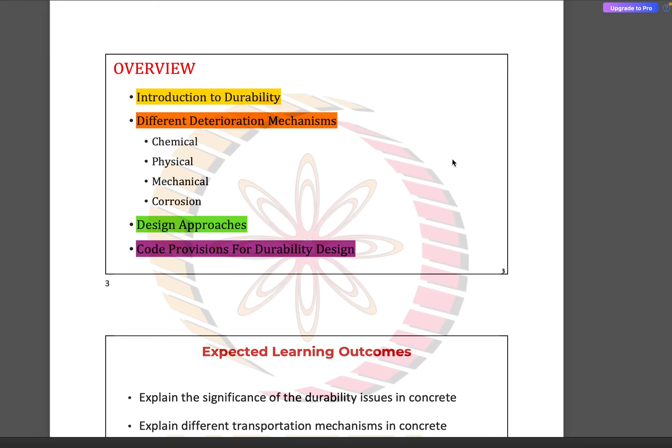This module has been divided into 4 parts. The first part consisted of the introduction to durability aspects in reinforced concrete design, giving an overview of the entire module. We first saw the introduction to durability, then looked into different deterioration mechanisms—chemical, physical, mechanical, and corrosion related aspects. Then we looked into design approaches for how to design structures to reduce and control the deterioration process, and we discussed code provisions associated with durability design.

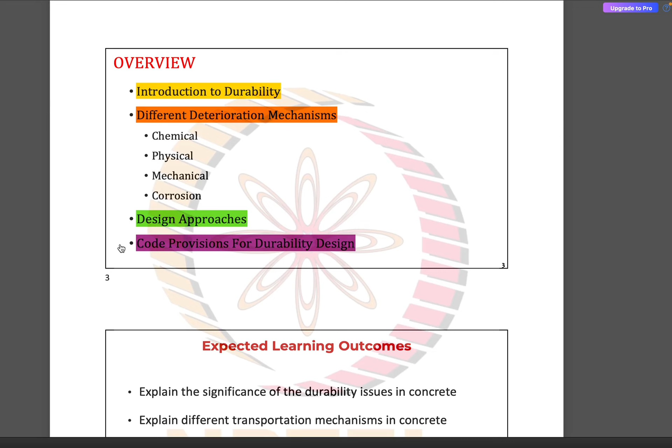For this part, the learning outcomes are that we understand the significance of durability issues in concrete, try to understand the different transportation mechanisms within concrete, and look into different methods of improving the durability of reinforced concrete.

When designing a structure, essentially we look into the strength and serviceability aspects, but the durability aspect is equally important, because if a structure is not durable, it cannot meet its desired service life. It tends to deteriorate well before the service life, requiring repairing functions to restore the structure so it can resume regular functioning in terms of strength and serviceability.

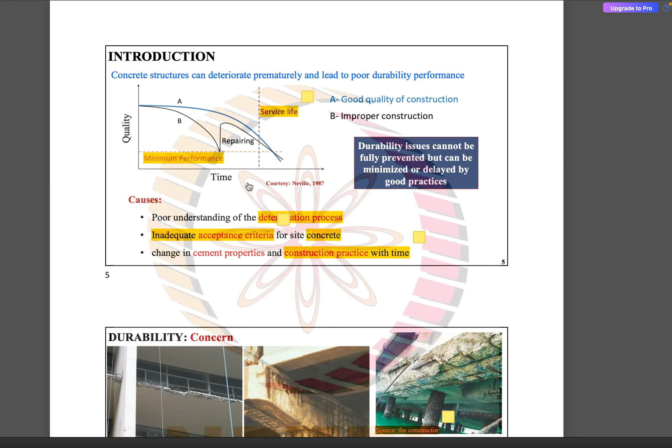So it is important to address the issues of durability during the construction process. This is what happens to structures if the durability aspect is not taken into consideration—here we can see there is spalling of the concrete cover and exposure of the steel reinforcement within RC structures.

So when we try to look into the definition, the durability of structure can be defined as its ability to withstand its design service condition for its design life without significant deterioration or with minimum maintenance.

In order to ensure that a structure is durable, we need to look into two important aspects: the reinforced concrete system and the environmental conditions. For the concrete system, there are intrinsic factors such as cement type, cement content, and properties associated with the concrete. Then we have extrinsic factors, that is how the concrete is prepared, mixed, and placed so as to achieve the functions it was initially designed for.

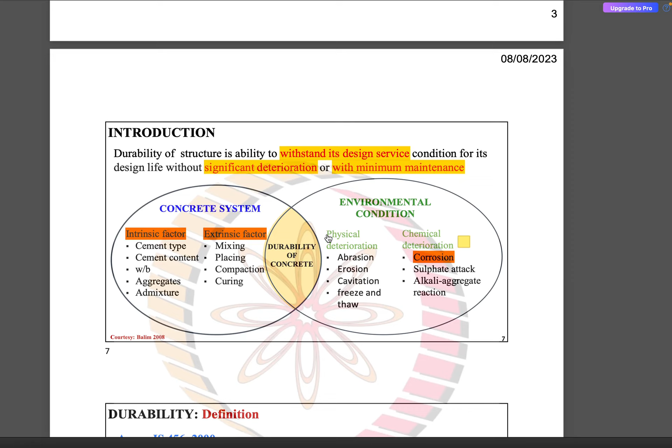Then we have the external environmental conditions. We have to design structures to withstand environmental conditions, be it physical deterioration or chemical deterioration and so on. The IS 456 and ACI codes have different definitions for the concept of durability.

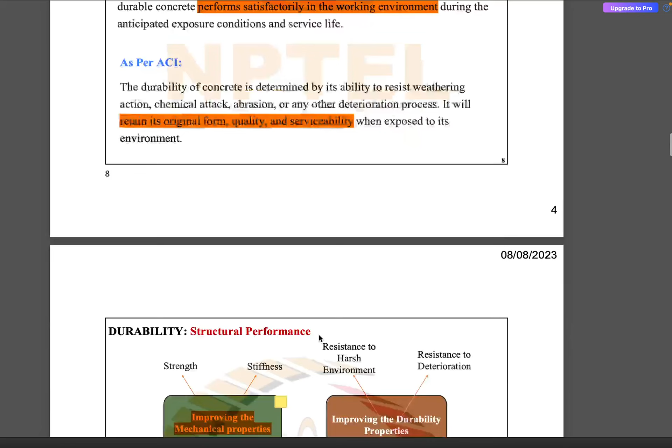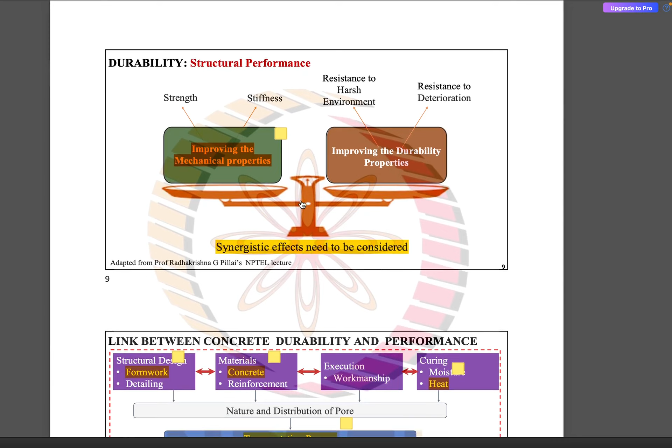Moving forward, when we look into mechanical properties, we are primarily concerned with strength and stiffness. When we look at durability properties, we need to ensure adequate resistance to the harsh environment and the required resistance to external deterioration processes. So to ensure successful functioning of reinforced concrete structures, we need to consider the synergistic effects of mechanical properties and durability properties.

Moving forward, we look into the link between the durability of concrete and its performance. Right from the process of structural design, detailing, material properties and how it is cured, that affects the nature of the concrete and the distribution of pores, and that affects the transportation process.

The transportation process, as we'll see later, is essentially the transportation of fluids and ions within the concrete. As the transportation of chemicals becomes easier, the concrete becomes more vulnerable to the process of deterioration, and therein lie the durability issues.

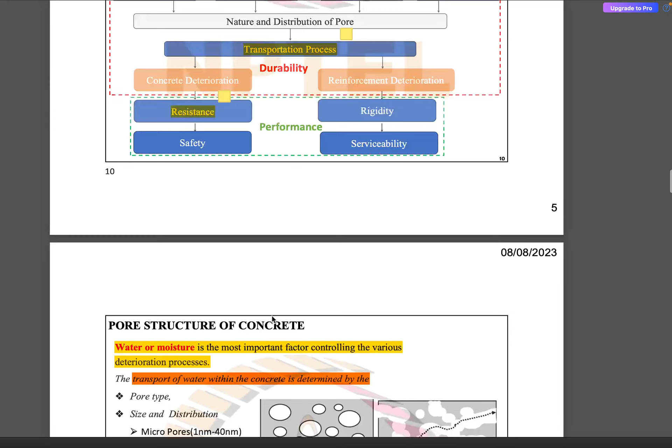If you are able to achieve adequate durability properties, then even the performance of the structures can be safeguarded. So here we look into the different types of pores, and one of the most detrimental aspects is when there is interconnection between them, making the transportation of fluids and ions much easier, leading to an accelerated process of deterioration. These are the different sizes of pores within concrete.

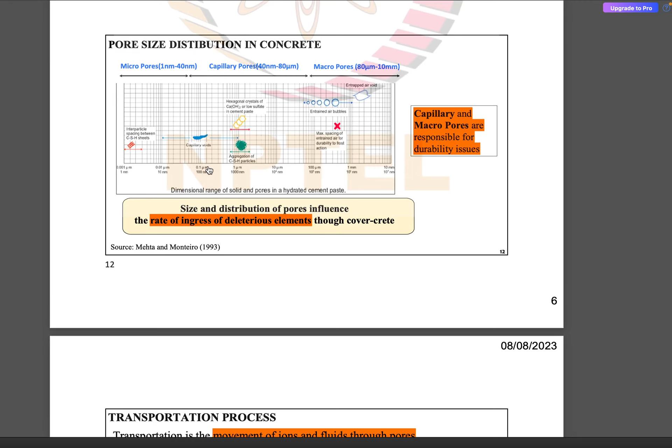Usually there will be transportation of aggressive agents, so we need to ensure adequate concrete cover of suitable thickness, and the pore structure has to be managed so that there is no transportation of deleterious materials.

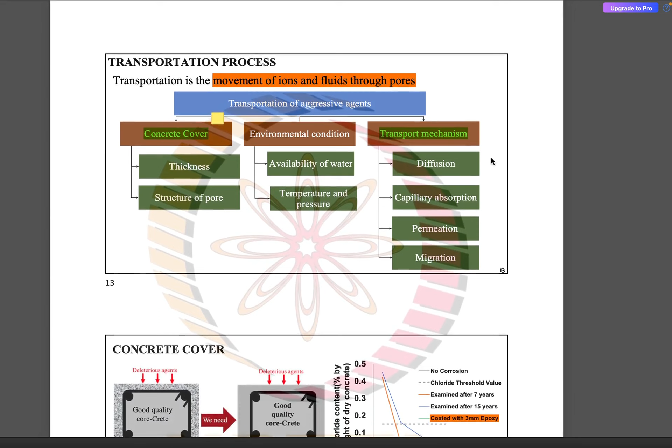Then we need to design the concrete against environmental conditions such as availability of water, temperature and pressure factors, and against different transportation mechanisms such as diffusion, capillary absorption, permeation, and migration. Here we look into the aspect of concrete cover.

Whenever there is an attack of deleterious agents, if we are able to provide good quality cover concrete, that will enhance the durability and quality of concrete significantly over a period of time.

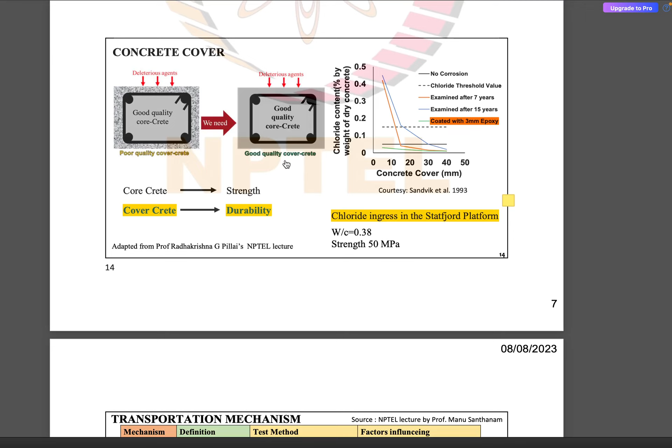So we have different transportation mechanisms and their associated definitions. For example, we have absorption related to capillary action, then permeation, which refers to flow under a pressure gradient, then diffusion, flow under a concentration gradient, and migration, which is essentially the movement of fluids and ions under an applied electric field.

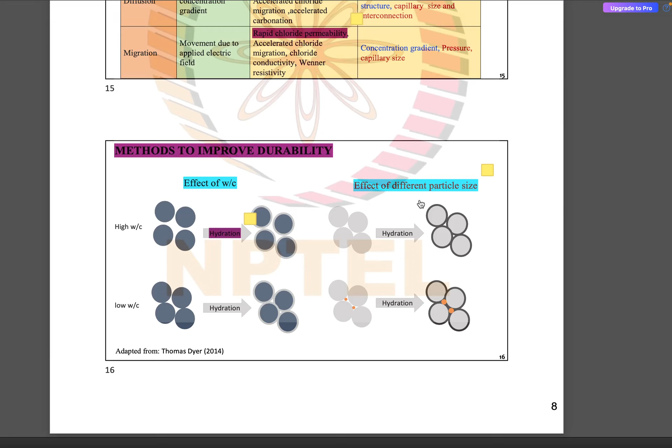Some of the ways of improving durability are reducing the water to cement ratio, and using small particle size components such as supplementary cementitious materials, which can fill the gaps within the concrete and improve its durability. Then we have certain mineral and chemical admixtures.

We'll be looking into certain problems and multiple choice questions in order to understand the role of these admixtures in ensuring good durability properties of reinforced concrete. Then we have the chemical reaction when we use supplementary cementitious materials.

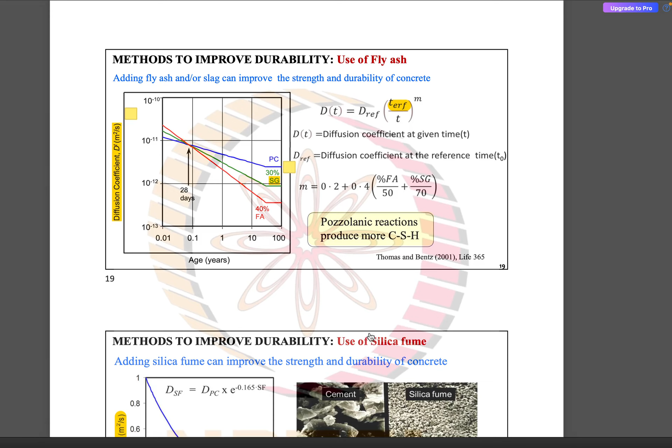Moving forward, we study the diffusion coefficient and how it varies when we use supplementary cementitious materials such as fly ash and silica fumes, and we are going to solve certain numerical problems based on these concepts.

Moving forward, we use certain chemical admixtures. So in summary, we looked into the introduction to the durability issues.

Okay, so I hope that all of you are with me. We can go ahead with the subsequent slides. Yes, sir. Yes.

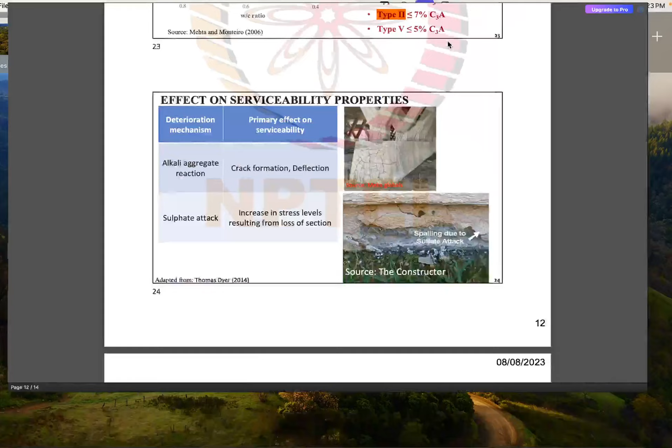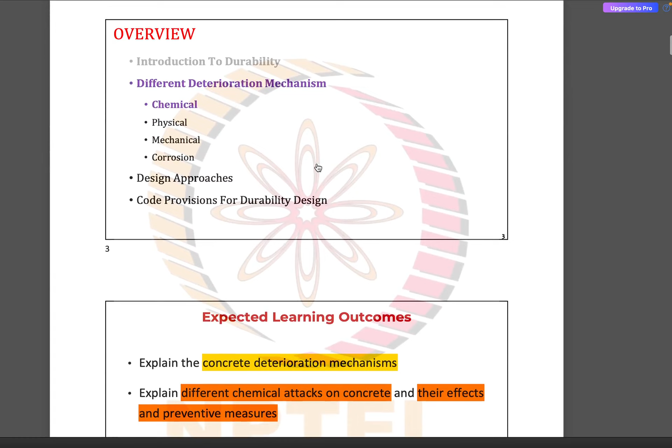So in the second part of the module, we looked into the process of chemical deterioration. There are different types of deterioration such as chemical, physical, mechanical and corrosion aspects. When it comes to mechanical aspects, we have abrasion and erosion. When it comes to physical, we have the freeze and thaw effects. When it comes to chemical, we have the alkali aggregate reaction or alkali silica reaction and the sulfate attack. Then we have the process of corrosion within reinforced concrete.

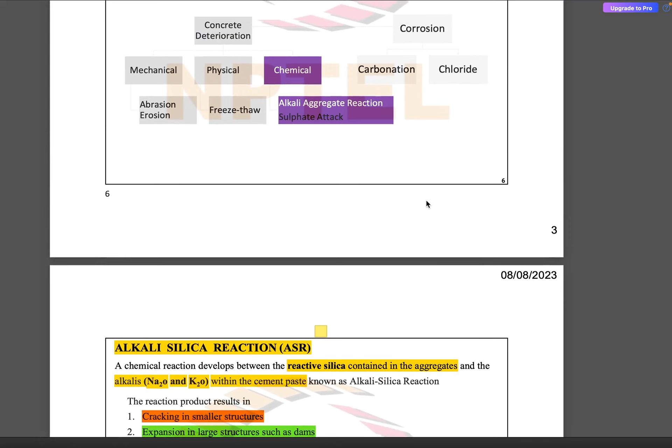So coming to the chemical mechanisms of deterioration, we have the alkali silica reaction. Essentially, alkali silica reaction refers to the chemical reaction between the reactive silica that is contained in the aggregates and the alkalis which are present in the cement paste.

This leads to the formation of a gel around the aggregate particle. Whenever there is availability of moisture, it tends to absorb the moisture from the concrete and from the surrounding environment. That leads to the expansion of the gel, which leads to subsequent cracking within the concrete.

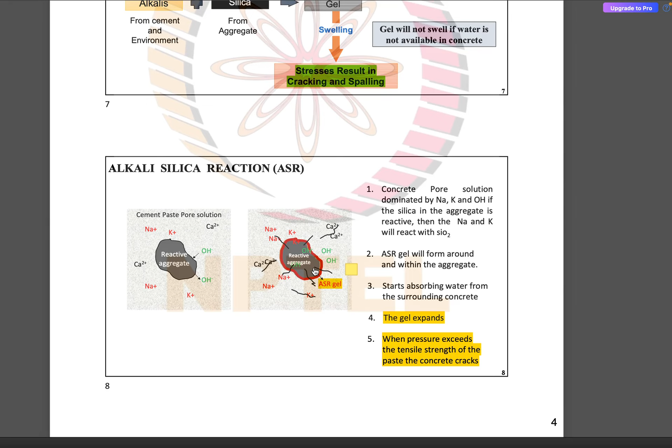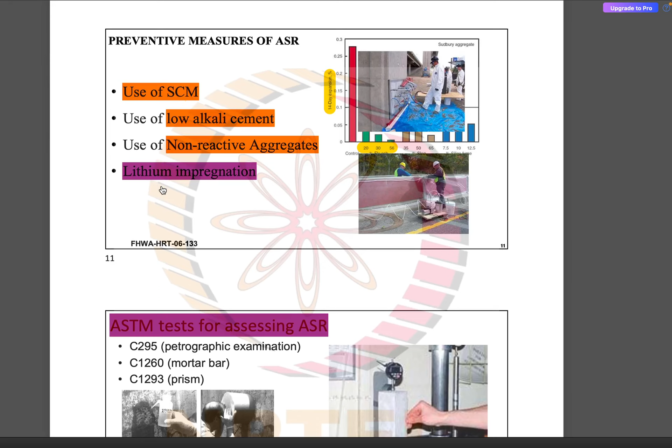Some of the ways of preventing or mitigating the effect of ASR are the use of supplementary cementitious materials, low alkali cement, non-reactive aggregates and lithium impregnation. These are some of the tests which can help us to assess the process of ASR within the concrete.

Then we have the sulfate attack. When it comes to sulfate attack, it can be essentially external and internal. The external attack can be from the soil, which consists of certain compounds of sulfate such as calcium, magnesium and so on, and similarly water also. So this is the effect of sulfate upon concrete.

It can lead to significant deterioration in terms of quality. As we can see, as we already saw in the alkali silica reaction, by altering the water cement ratio, by reducing the water cement ratio, we can mitigate the influence of sulfate attack to a considerable measure.

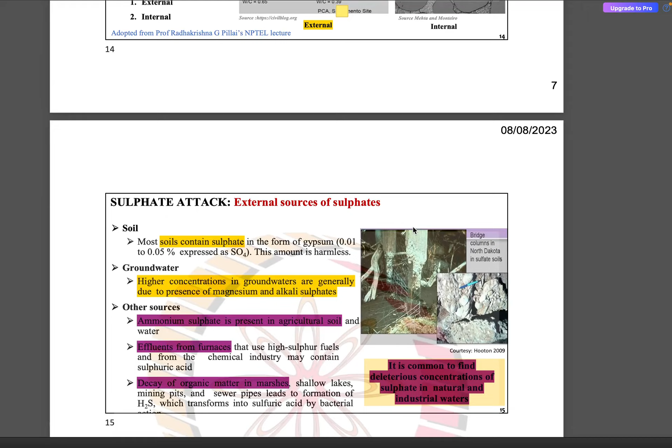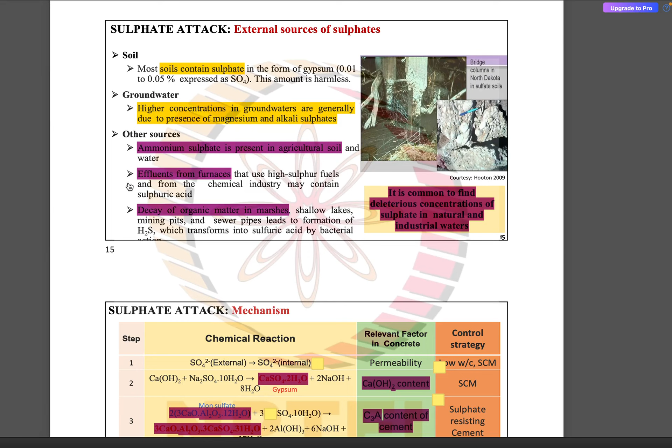When it comes to internal attack, we will be looking at the delayed ettringite formation, which we also looked into in week 2 of the lecture. These are some of the sources of external sulfates, such as the soil, groundwater, and agricultural soil, and the effluents from furnaces, and so on.

As we saw, the reaction between the monosulfate and gypsum leads to the formation of ettringite. Whenever there is a presence of high C3A in the cement, that leads to high heat of hydration, and that leads to the formation of monosulfate, and later on, when it is conducive for the monosulfate, it transforms into ettringite, which is a needle-like structure.

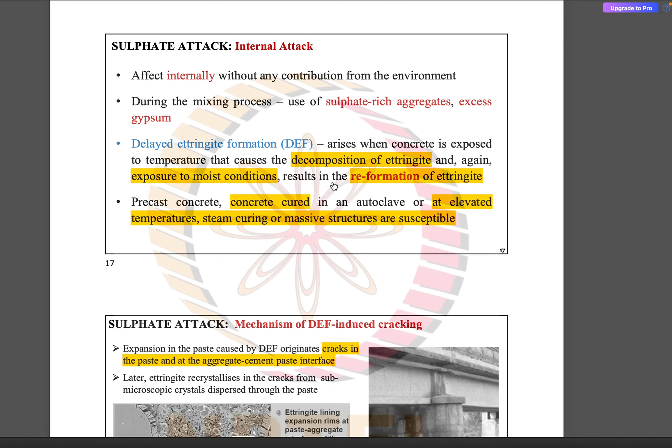Because of the structure of the ettringite, it leads to expansion within concrete, and that leads to cracking and other durability related issues. As I was discussing in the previous slide, this is the process of delayed ettringite formation, that leads to various durability related issues, and these are some of the effects due to the delayed ettringite formation.

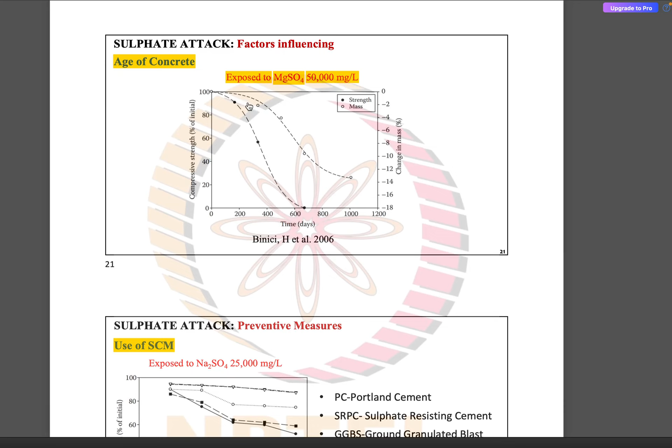Because of the sulfate attack, there can be significant reduction of the strength and mass of concrete. This affects the stiffness and the strength of the reinforced concrete structures.

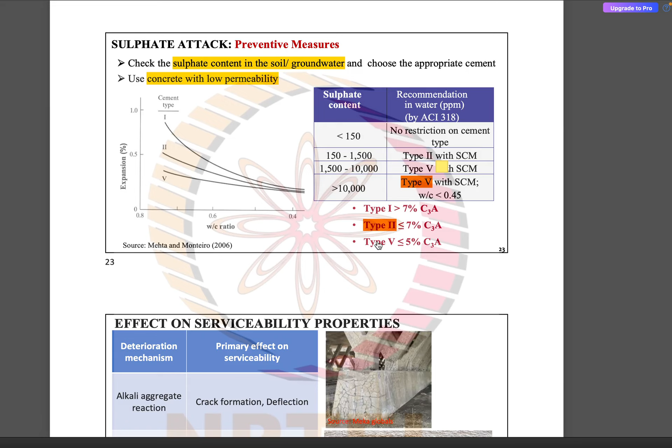Here there are some research articles, some results from the research, and in order to prevent the phenomenon of sulfate attack, we have certain types of cement that are being prescribed by the American Concrete Institute code, and by using essentially type 2 and type 5 cement, we can significantly mitigate the effect of sulfate attacks.

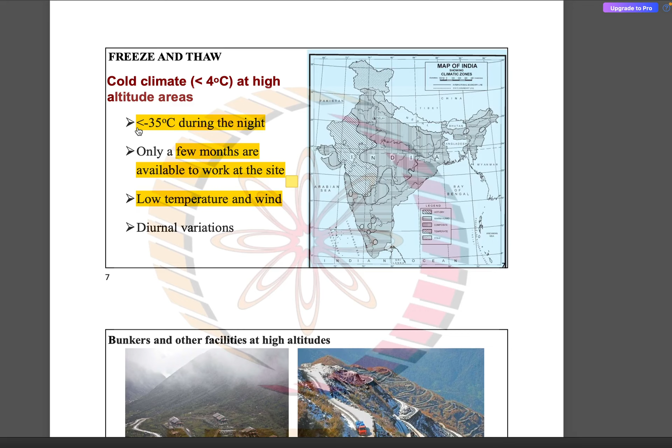Okay, moving forward, in the third part of the module, we looked into the physical deterioration mechanisms. As we were discussing in the previous class, there can be concrete structures that exist in extremely cold areas, and India is also exposed to temperatures of less than minus 35 degrees in certain cold climatic regions. So in cold climates, concrete experiences other types of durability issues, and primarily we have the freeze and thaw effect.

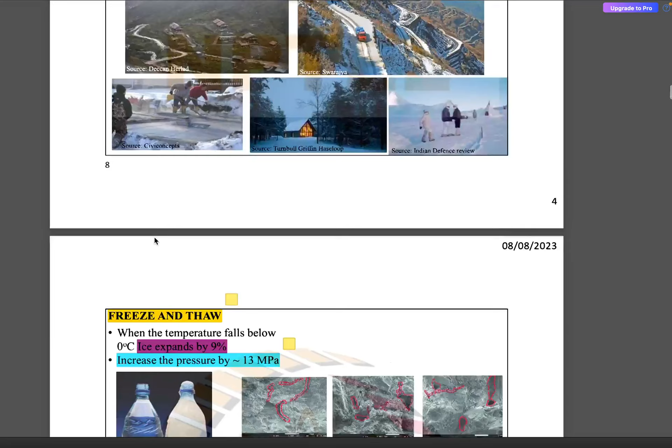As we can see, water exists as a liquid at room temperature. However, when it is cooled to sub-zero degree temperatures, it leads to the formation of ice, and it takes up more volume when compared to liquid water. When the water that exists between the concrete cracks is subjected to the process of freezing, that leads to expansion and subsequent cracking within the concrete.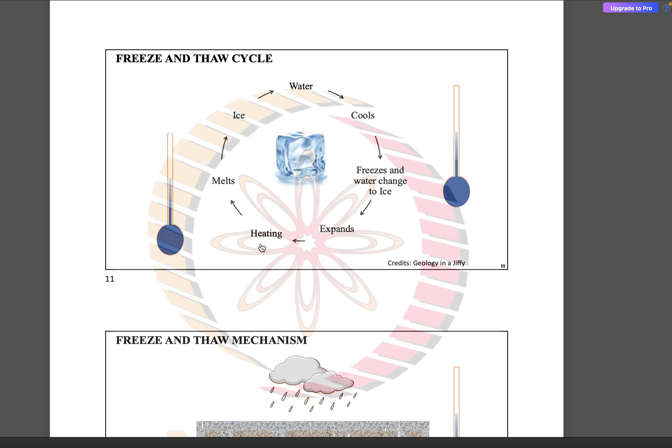So these are some of the effects of water that is present in pores of different sizes. This process of freeze and thaw is a cyclical process, because water enters the cracks within concrete initially. It cools, leads to freezing, leads to expansion, and the process of heating is otherwise called thawing. So as and when water gets accumulated in the pores of concrete, it leads to the process of freezing, cracking, and other deleterious effects.

Here, as we can see, because of the continued process of freeze and thaw, there can be accumulation of water, and subsequently there can be formation of significant cracks within concrete that can cause progressive failure within the concrete specimens. So this is another phenomena known as the popping out of aggregate particles.

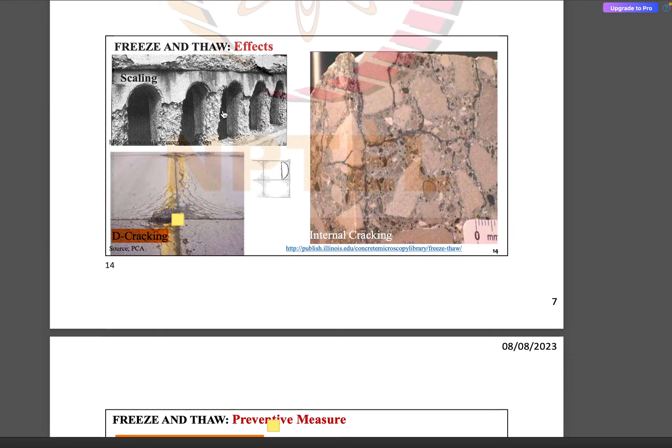When there is porosity within the aggregate particle, the water tends to accumulate within the aggregate particle, and the process of freeze and thaw leads to the process of cracking within aggregate, and the process is defined as the popping out of aggregate. So because of the freeze and thaw effects, there can be different types of cracking. We have the scaling effect, and the D-cracking within the concrete pavements.

In order to prevent the deleterious effect of freeze and thaw, we use air entraining agents. Air entraining agents induce air bubbles within the fresh concrete, so that whenever there is expansion of the hardened concrete, the expansion can be accommodated because of the existence of these air entraining agents. So we can see that because of the infusion of the air entraining chemicals within concrete, we can safeguard the mechanical properties such as the dynamic modulus and the durability aspects of the concrete.

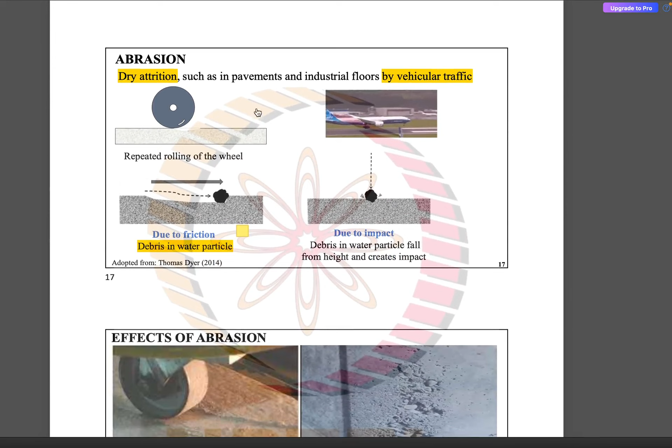Moving forward, we have the process of abrasion. Abrasion is defined as the attrition because of the rolling of two surfaces between each other. So here we can see the damage to concrete pavements because of the process of abrasion.

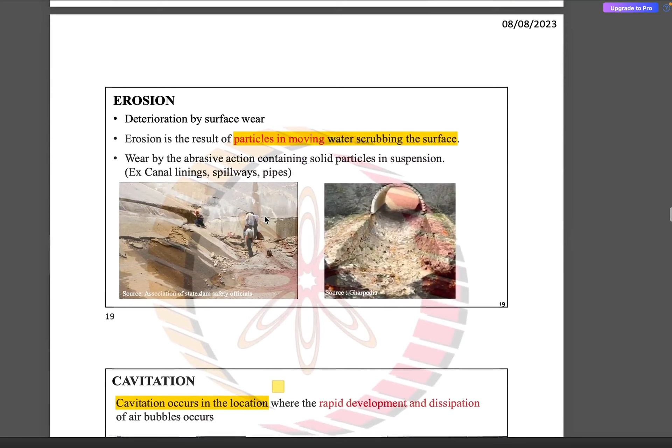And we have the process of erosion. So the main difference between abrasion and erosion is that in erosion, the particles are suspended within the water, and when the particles set to move, it leads to the process of scrubbing the surface of the concrete, which leads to the deterioration of concrete.

Then we have the process of cavitation within the spillways of the dams. When there is the formation and breaking of bubbles, that leads to the formation of small jets of water within concrete, and when the small jets of water impact the concrete at high velocities, that leads to the deterioration and damage to concrete, as you can see in these particular images.

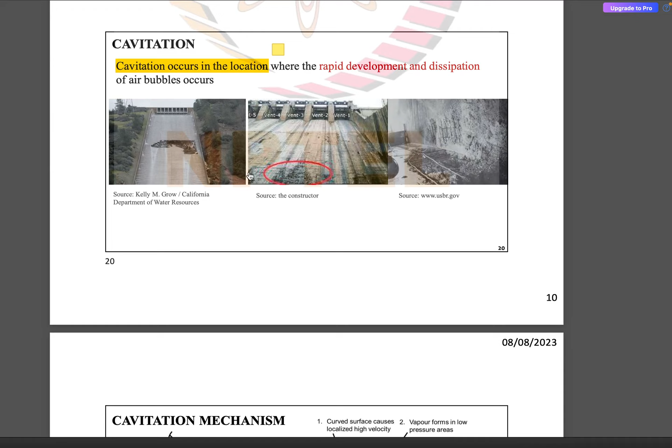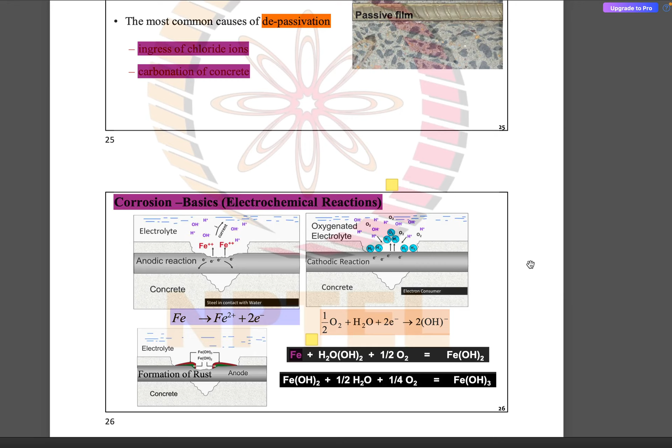Corrosion primarily affects the reinforcing steel, and it is one of the major issues when it comes to civil engineering structures. The corrosion essentially takes place because the steel rebar provides the anode and cathode, the oppositely charged ends of the battery, and the concrete acts as a medium in which the fluids can undergo circulation.

And whenever there is moisture available, it tends to form rust, and rust occupies significantly higher volume compared to steel. It occupies almost 6 times the volume of the corresponding steel, and because of the expansion within reinforcing steel, that leads to expansion of the steel and cracking within the concrete.

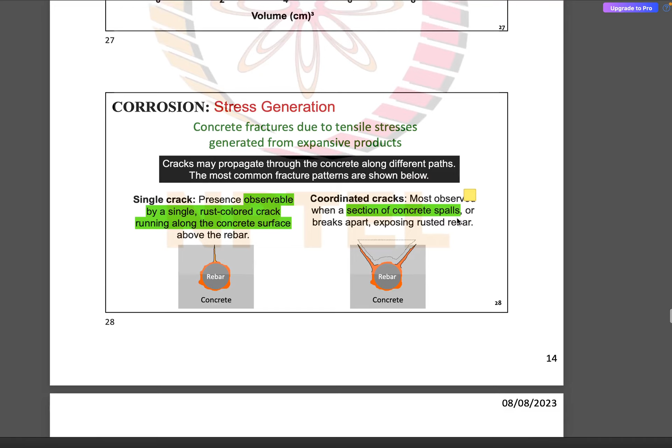So these are the different mechanisms of crack formation within concrete. These are some of the consequences: concrete staining, spalling, delamination, and so on. Then because of the addition of chlorides, there can be acceleration of the process of corrosion.

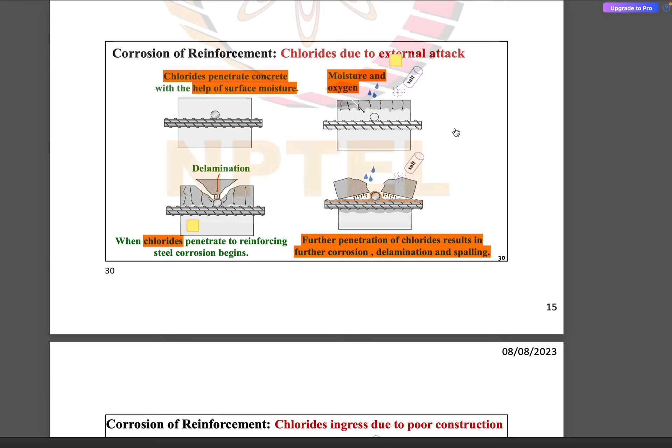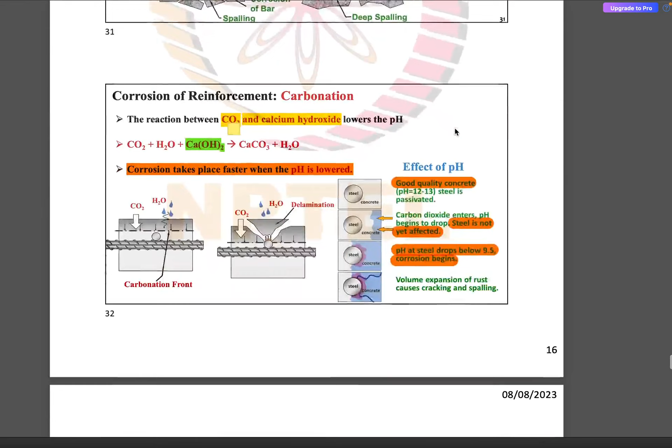There will be certain multiple choice questions. We are going to discuss about these aspects of the effect of chlorides and carbonation. Carbonation is related to the absorption of carbon dioxide from the moisture that leads to the reduction in the pH of the concrete, and the steel rebar becomes vulnerable to deterioration.

So these are some of the measures to prevent corrosion within reinforcement, and these are some of the effects on the serviceability aspects of concrete.

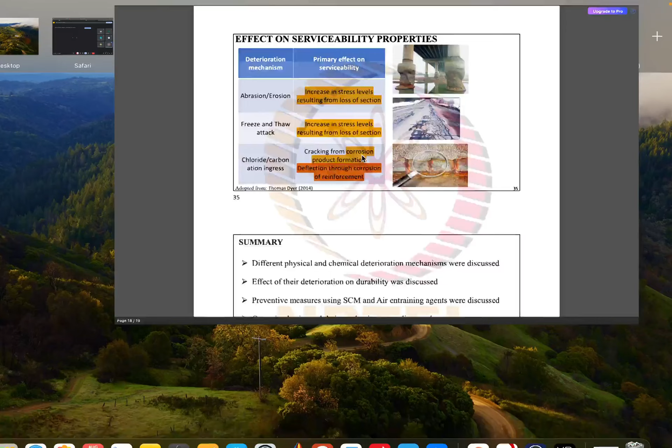So quickly we will look into the fourth part of the module. These are some of the design approaches, and we will look into the codal aspects as to how concrete structures are designed against the deleterious effects of durability. So these are some of the outcomes. We will learn what are the different design approaches that are taken for design against durability.

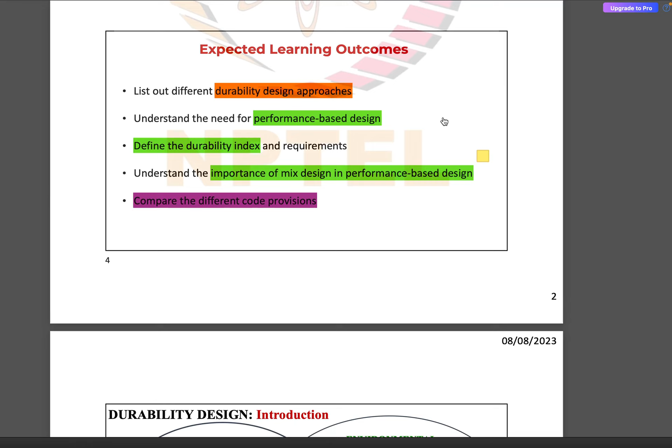Designing for higher durability, then we will look into the performance based design. Then we will define the durability index, and we will compare the different codal provisions. So essentially we need to ensure that there is adequate resistance within concrete in order to withstand the deleterious effect of certain environmental conditions and the aggressive aspects of the environment.

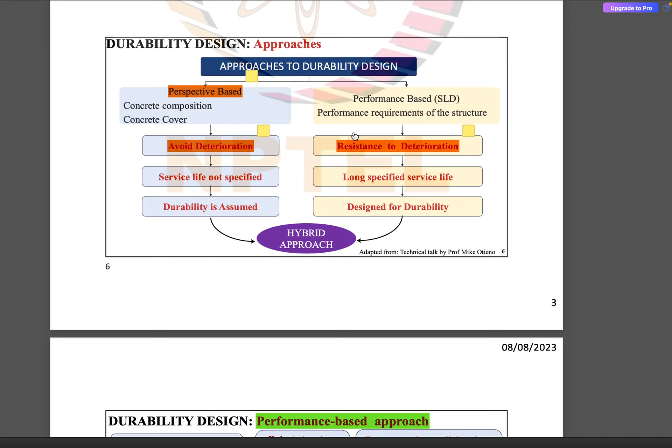So essentially there are two types of approaches to durability design. We have the prescriptive approach, which is provided by the codes, and then we have the performance based approach, which is an upcoming method of designing structures for durability.

So we have a nice flow chart where we ascertain the location of the structure, then characterize the aggressiveness of the exposure, then identify the dominant mode of deterioration, whether physical, chemical, corrosion, and so on. Then we select a suitable service life model, design the concrete mix, the cover depth, the binder type, and obtain the durability index corresponding to the environmental exposure.

Then we test before construction, then move forward to the process of construction. Then we perform tests on the existing structure, and if it meets our requirements, we accept it. If not, we can take other steps, such as remedial actions, or we can entirely reject it.

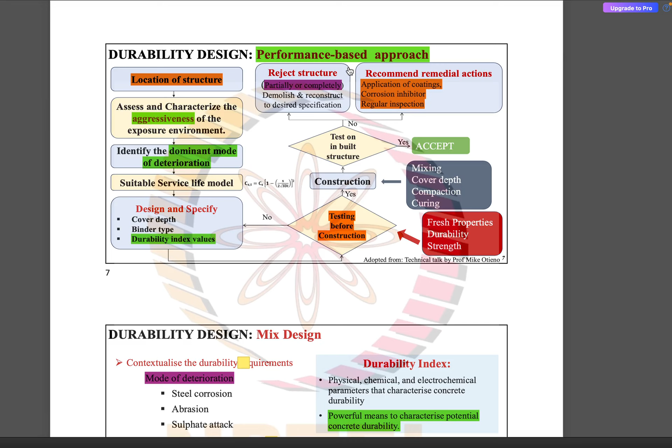So moving forward, there are certain tests which are present. We have oxygen permeability, water sorptivity, and RCPT. We will discuss more about them in the multiple choice questions.

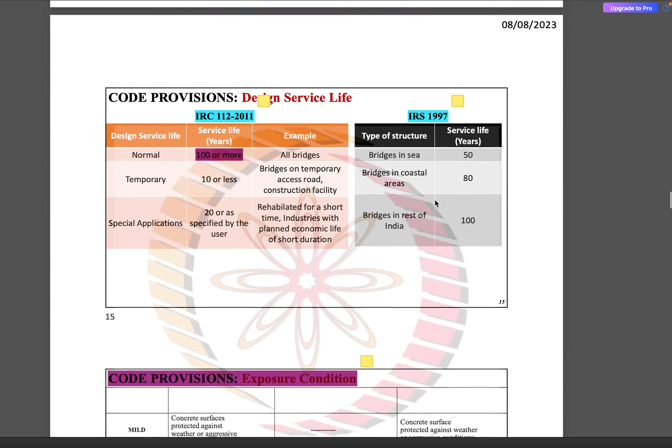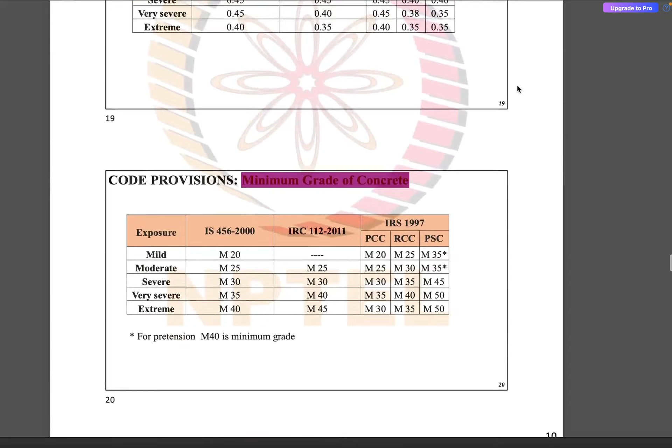And then moving forward, we have the codal provisions. So we have looked into the different codal provisions within IRC 112, which refers to the Indian Roads Congress Building Code for the construction of road bridges. Then we have IRS 1997, which corresponds to the design of railway bridges in India. And then we also looked into certain durability related provisions as per IS 456.

Okay, so I think we have taken up more than 30 minutes on this discussion. So without any further ado, we will start with the multiple choice questions for today's session.

So I'm sorry about that. Okay, so I think we are ready. I hope my screen is visible.

Yes sir, it's visible. So this is the first question. Which of the following mechanisms are not associated with either physical or mechanical deterioration of reinforced concrete? In other words, you need to select the options that are associated with mechanisms other than physical and mechanical deterioration.

Option C, sulfate attack. Okay. So anybody else would like to contribute to the discussion? So the hint is that there are two correct options for this question.

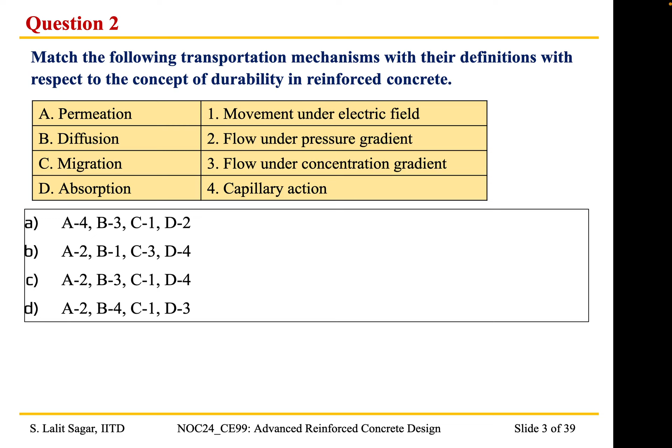Okay, so as some of you rightly pointed out, the answer is C, and the explanation is this. It is adopted directly from the lecture slides, which has been taken in turn from the NPTEL lecture of Professor Manu Santhanam from IIT Madras.

So essentially transportation mechanism is the process of transportation of ion and fluids within the concrete structure. So it is this transportation that leads to accelerated deterioration within concrete. So we need to check the process of transportation mechanism so as to safeguard the durability of concrete.

So we have absorption. Absorption is defined as the capillary action, and the value of absorption is ascertained by the sorptivity test. Then we have permeation. Permeation refers to the flow under pressure gradient, and this is ascertained using the oxygen permeability test.

And diffusion refers to the flow under concentration gradient, and this can be ascertained using the RCPT test, rapid chloride permeability. And we have the process of migration, which is essentially movement due to applied electric field. And as with the process of diffusion, even this can be ascertained by the RCPT test.

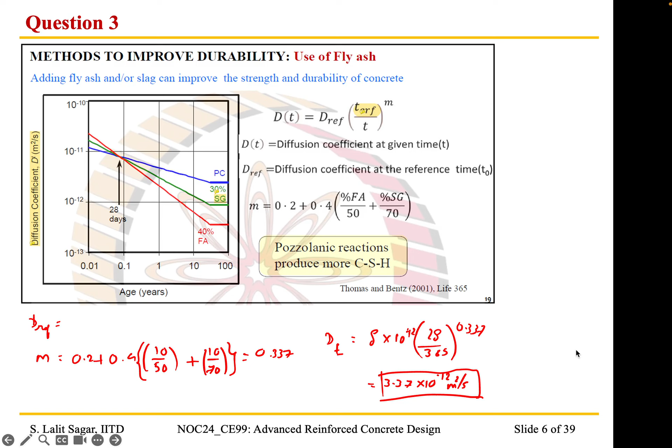This is how we calculate whenever there is replacement of Portland cement with fly ash and blast furnace slag. So I would request you to solve the next problem, which is quite similar to what we solved in this question number 3.

Okay, so I invite you all to solve the same problem, similar problem, but the difference is that instead of 10% replacement, we have 20% replacement of fly ash and 20% replacement of blast furnace slag. So I request you to solve the problem. It is quite straightforward, and if you can kindly explain the physical significance of this diffusion coefficient. What is happening when we replace Portland cement with these supplementary cementitious materials? Kindly solve the problem.

2.37? Okay, that is option E. Yes, okay, thank you for your answer. Others also, I request you to. Option E, okay, 2.37, okay, thank you for the answer. So I will give 1 minute to all the participants. After that, I would be glad if any one of you can explain what is the significance of this value. What is happening when we replace Portland cement with the fly ash and blast furnace slag?

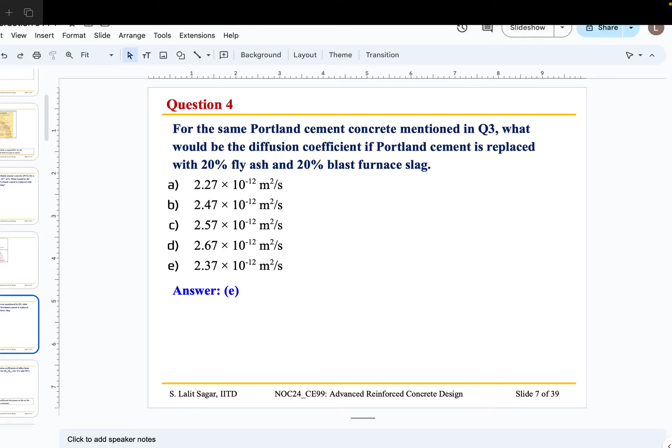So before moving further, can any one of you explain what is the physical meaning of the answers that we got? Diffusion effect is reducing, sir, durability is increasing. Yes, I think that sums up the answer correctly, because the diffusion coefficient is inversely proportional to durability, so we want a lesser value of diffusion coefficient. So as we are replacing Portland cement with the different other constituents, we are reducing the value of diffusion coefficient. Okay, so thank you for the answer.

So moving forward, we have... I'm sorry.

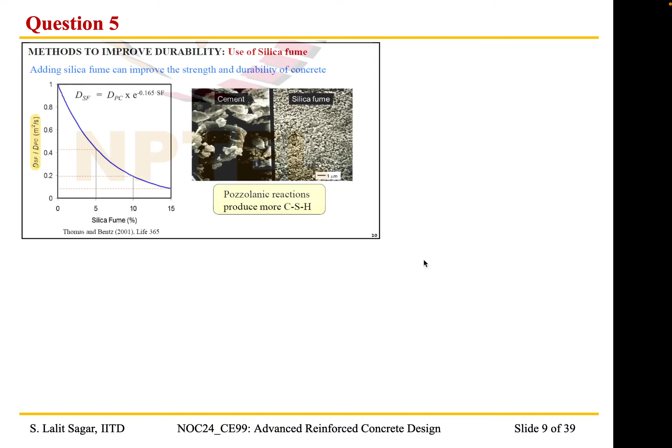Air. Okay, thank you for the response. Anybody else would like to answer?

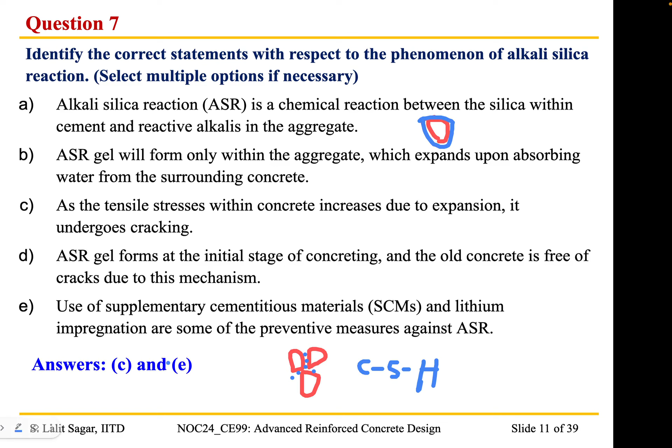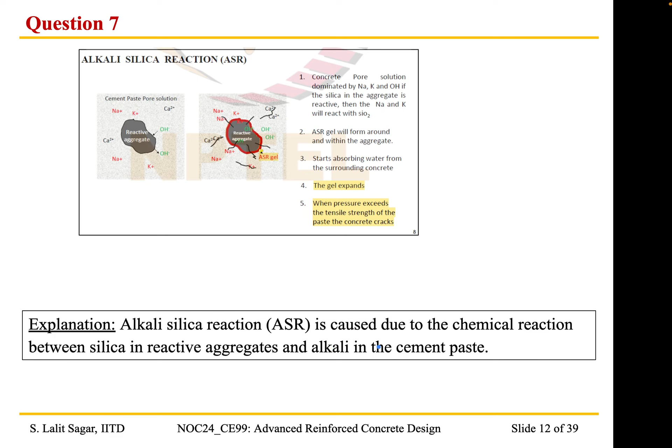Okay, so the correct options are option C and option E. Again, the correct answer is: it is caused due to the chemical reaction between the silica in reactive aggregates and the alkali in the cement paste.

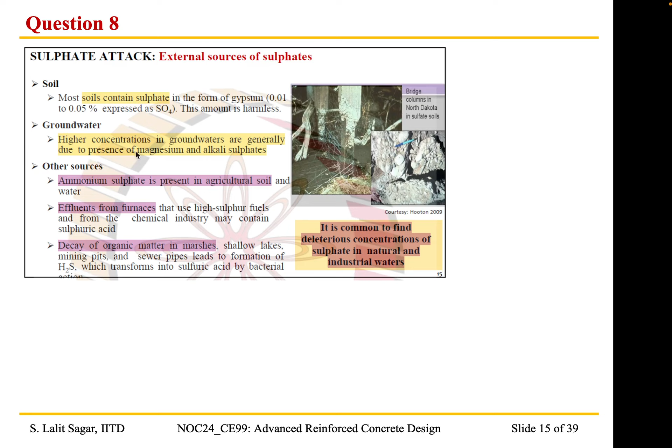So whenever there is scope for contamination or high sulfate content, we need to design the structures accordingly. Moving on.

So this refers to the options. When gypsum is being formed, we have the products of hydration. In order to take away the gypsum, we need to use supplementary cementitious materials such as fly ash, silica fume, and blast furnace slag. This will reduce the effect of sulfate attack on concrete, and we need to maintain a low water to cement ratio to reduce the permeability of concrete. We also need to reduce the content of C3A within cement, and wherever we are expecting sulfate attack, we need to try and use sulfate resisting cement as much as possible.

Moving on, so the popping out of aggregate particles is associated with which kind of degradation mechanism in concrete? We have 5 options.

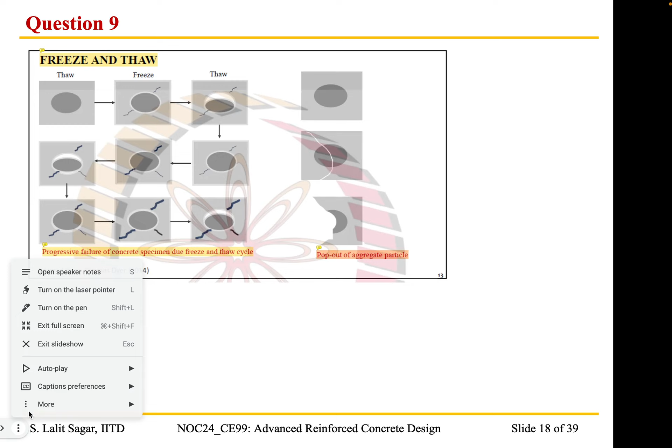Using red for better visibility, this is the process where whenever there are pores, there is accumulation of water, and water tends to fill up in these cracks. Whenever there is freezing, there is expansion of the volume of water when it forms ice, and that expansion leads to cracking, and because of cracking more water gets accumulated. So it is essentially a cyclical process.

So as and when water accumulation takes place, again freezing and thawing, it leads to the formation of wider cracks.

However, if we take this aggregate particle, so this is essentially an aggregate particle. If aggregate has some pores, as you can see here, whenever there is ingress of water, water tends to accumulate in the pore within the aggregate, and whenever there is freeze and thaw effect within the aggregate particle, the aggregate particle can rupture. So this phenomenon is called the popping out of aggregate particle.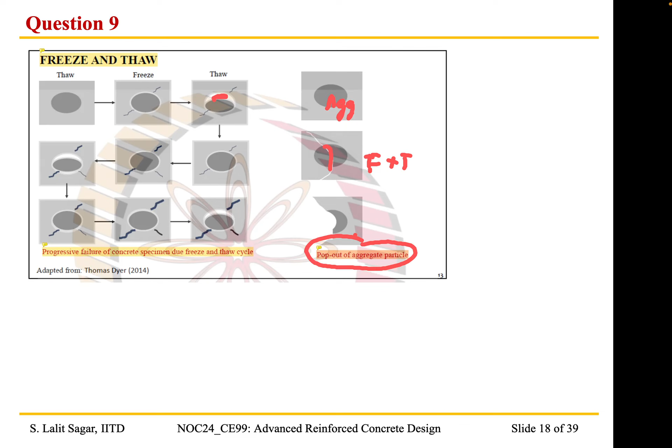Okay, so thank you for the response, and we'll move ahead to the next question.

When it comes to the different types of cement, what do type 2 and type 5 cement correspond to as per the American Building Code requirements for structural concrete, that is ACI 318? Similar to IS 456, the Americans have the ACI 318 code. So in that code, what do type 2 and type 5 cement correspond to?

Option A. Right. Thank you for the response. Anybody else would like to volunteer?

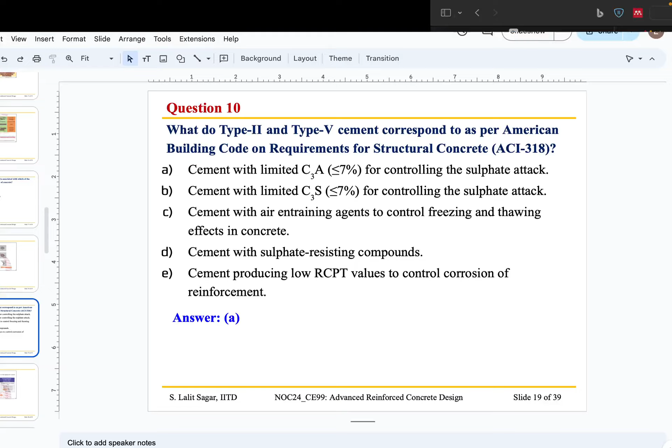So we were looking at the different types of corrosion, right? Excuse me, I will open the PPT to explain this. I think we were in... right. So allow me to use the pen for this one. So we were looking at the different types of deterioration mechanisms.

We have the physical, we have the mechanical, and we have the chemical, and then we have the corrosion, right? So the first two correspond to the process of sulfate attack. So in chemical we had the alkali silica reaction, and then we had the sulfate attack, right?

So in order to mitigate the sulfate attack, what do we do? One of the steps is that we limit the amount of C3A. As I was mentioning, and one of the participants also mentioned, C3A is associated with the high heat of hydration.

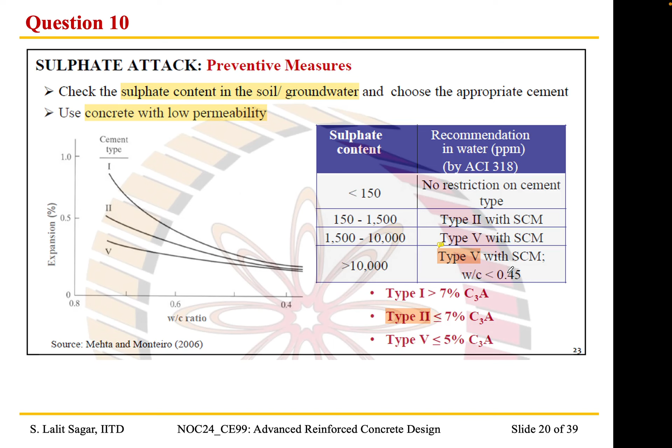Okay, thank you for the answer, and we'll move on to the next question.

So we need to match the different mechanisms with their appropriate definitions. I hope all of you can see my screen. We have cavitation, abrasion, erosion, and corrosion.

Option D. Okay, D for Delhi. Yes. Right. Thank you for the answer.

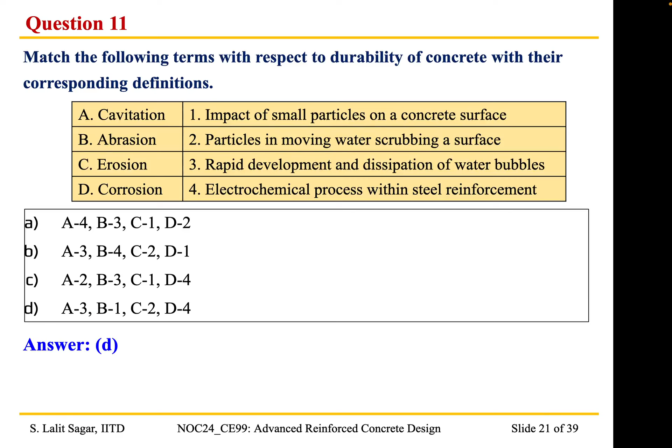Excuse me. I need to switch to the Google Slides, so that... yes, option D is the correct answer, and it is quite straightforward.

Cavitation refers to the rapid development and dissipation of water bubbles, which we see in the spillway of dams. Then we have abrasion. Abrasion refers to impact of small particles. Erosion is associated with particles within moving water, which results in the scrubbing of a surface. Then we have corrosion, which is an electrochemical process. A lot of research is being undertaken with respect to corrosion in steel reinforcement.

Moving on, so again a picture based question. I would request you to match the following mechanisms of deterioration within reinforced concrete with the appropriate pictures.

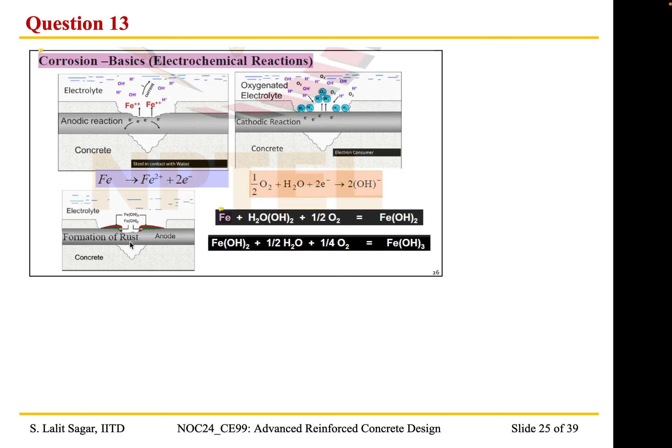So rust is about six times greater in volume compared to steel, and that leads to the expansion of steel rebars and subsequent cracking of concrete.

Again, the two primary mechanisms responsible for corrosion are the ingress of chloride ions and the carbonation of concrete. As we saw in the previous lecture, because of the absorption of carbon dioxide from the environment, it leads to the formation of carbonic acid, and the pH of concrete reduces. When the pH reduces, the protective coating around the reinforcing steel is destroyed, and that leads to the process of corrosion.

In cold countries, usually de-icing salts are used in order to dissolve the snow or ice accumulating on concrete. But this salt, because it contains chlorides, tends to induce the ingress of chlorides within concrete, and that can accelerate the process of corrosion.

So whenever we are using these kind of chemical agents, we need to be careful about the issue of chloride attack. So yes, ultimately the correct options are ingress of chloride ions, carbonation of concrete, and use of dissimilar metals.

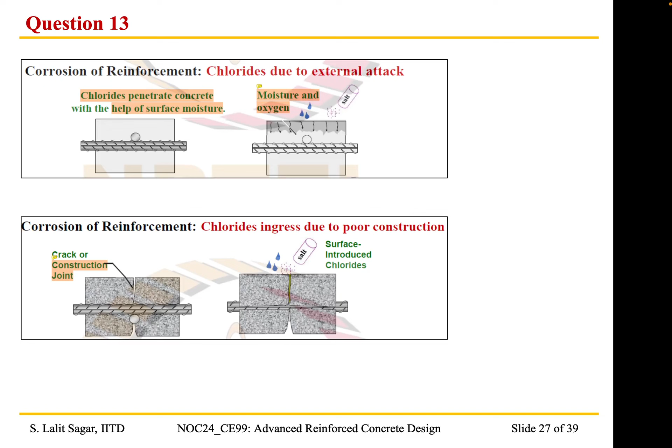Moving on, we have the next question: which of the following options are incorrectly matched regarding the prescriptive and performance based durability design of concrete?

So there is one Option C, yes C, thank you. So there is one incorrect option, and it has been taken directly from the lecture slides. Option C. Okay, thank you for the response.

Without any delay, we will look at the answer, and the correct answer is option C. Those who are working in earthquake resistant design, so I am also working in earthquake resistant design of structures. So the concept of performance based design is a very upcoming topic. We usually design structures to achieve a certain kind of performance in earthquakes, with respect to a particular drift level, and when we extend that concept to durability, it leads to a satisfactory design life, satisfactory service life.

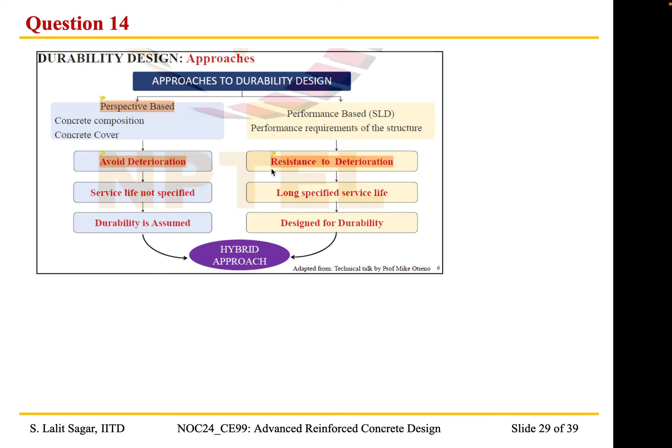On the other hand, when we are designing based on performance based design, usually it is designed for durability, and a service life is specified, let's say 50 years or 60 years. Instead of saying that we are going to avoid deterioration completely, we are saying that we are going to provide only resistance, which is more realistic, because durability and deterioration is a part and parcel of any structural building. So it makes more sense that we are using the term resistance than using the term avoidance.

Okay, so the correct option is option C, it is interchanged, right? This is the flow chart that I also explained, and I think this would explain the crux of the concept of performance based design.

Moving on. Identify the incorrect statement with respect to the tests on durability of concrete. Out of the 6 statements, there is one incorrect statement. I request the participants to kindly identify the incorrect option.

Option F. Okay, thank you for the answer. Anybody else would like to volunteer? Sorry about that.

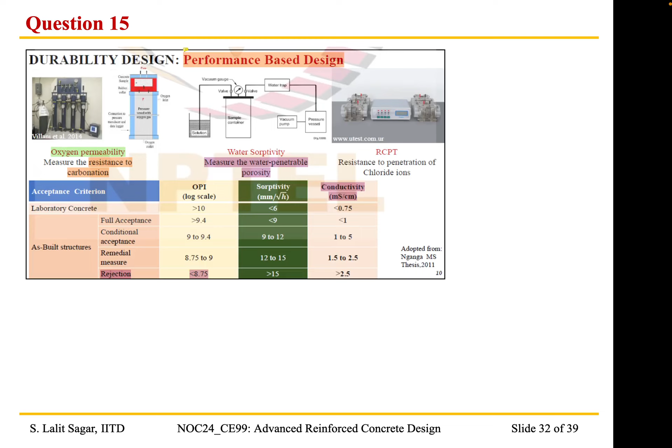Okay, the question has been taken directly from the lecture slides, and the correct answer is option B, because oxygen permeability test is conducted to evaluate the resistance of concrete to carbonation. However, if the value of OPI is higher, the susceptibility of concrete to carbonation is lower.

As we can see, if OPI is very high, for example 10 and so on, it means that it is having very good durability properties. On the other hand, other options are correct. Water sorptivity test is conducted to measure the water penetrable porosity; higher the sorptivity value, greater is the concrete porosity. RCPT is conducted to determine the resistance of concrete to chloride penetration; higher the value of conductivity, greater is the vulnerability of concrete towards penetration of chloride. All the options are correct, so I request you to just go through the tests once again.

Moving on, this is again based on the prescriptive durability design. So 3 questions are interlinked to one another: 16, 17 and 18. For concrete structures which are constructed in a coastal environment, which category of environmental exposure conditions are they classified under as per IS 456? And if you are using M40 concrete, what should be the corresponding nominal cover to the reinforcement?

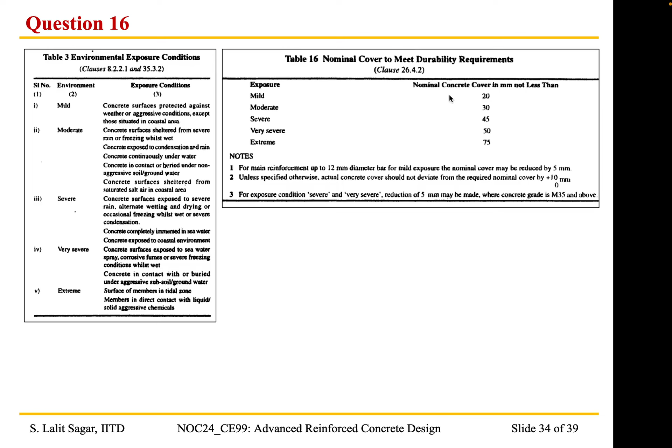Now for the environmental conditions mentioned in question 16, what should be the minimum cement content, maximum water to cement ratio, and the minimum grade of concrete?

Anybody would like to volunteer? We have just one question after this.

So again, when we are doing concreting, you should know what the code says regarding the mix design for severe environmental conditions. So the answer is C. Thank you for the response.

Anybody else would like to volunteer? The reference is the lecture slide, but I would always recommend that you look at the codal provisions directly, so as to ascertain that the answer is correct. So the correct answer is option A.

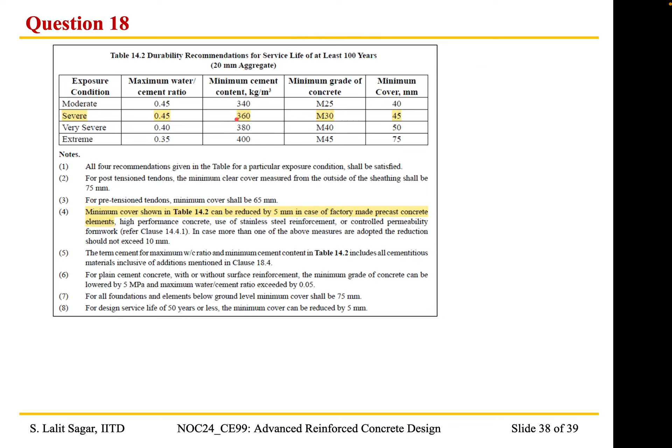As I was mentioning, I have to refer to this code, and these are the values I have taken. I think the participants made a very nice observation here, because we are referring to factory made precast elements. Whenever we assume 20 mm aggregates and use precast elements, we can have a relaxation because it is of higher quality, so we can reduce the minimum cover by 5 mm. So ultimately, the minimum grade of concrete is M30, minimum cover is 40 mm, minimum cement content is 360 kg per meter cube, and maximum water to cement ratio is 0.45.